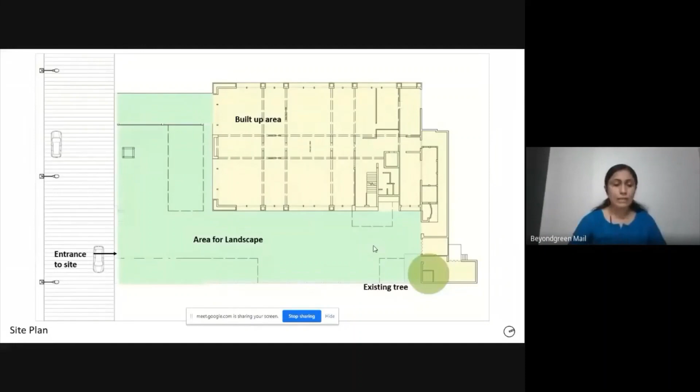So we started with the facade development and first did some volumetric studies for this. While we were doing this, the intent of the design was to create a facade which was site responsive, climate responsive, and at the same time aesthetically appealing in the context where it was situated. Our approach was firstly to shy away from the whole idea of what we call pigeonhole window facades, and instead have a screen which will make the skin of the building.

This will also allow the visual connections as well as cut down the harsh light, since the major two facades of the building were from the southwest and the southeast. The other observation we had was that the building felt very flat, and we thought we should increase the volume of the building in some way.

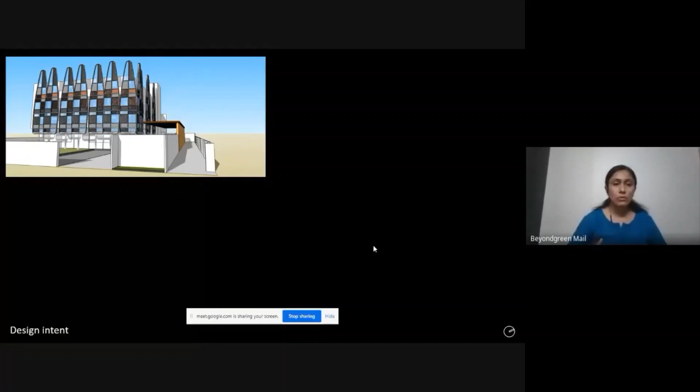So this was the first attempt we made for the development of the facade, where we had these huge leaves in the form of screens, and you can also see how we extended it over the height of the building. But then somehow we were not convinced with this.

Then we started thinking about what if we extend the floor planes and get some space for greens into it. You can also see the facade has been extended on the top to make a frame, so it looks like an added floor on top.

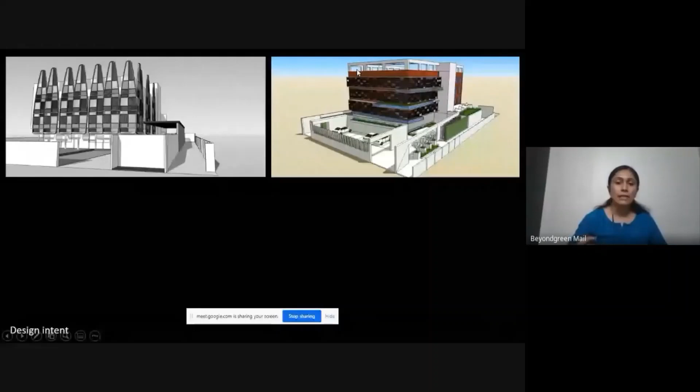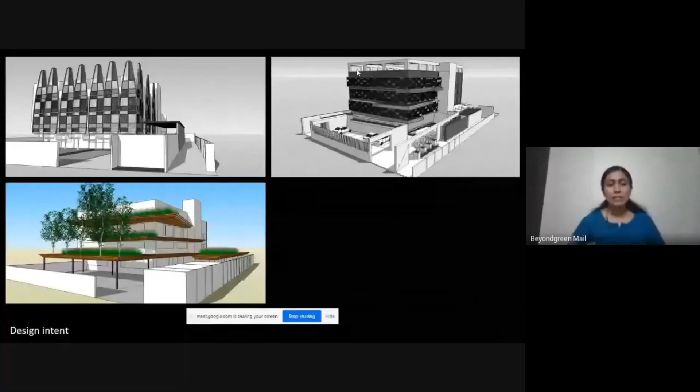And then, like a greedy designer, we extended these floor plates still further and started putting in the green. We always had this idea in mind that it should be green, so the building looks like it's behind the trees. After doing this, we got a mail from the structural design team saying this isn't possible, since we were increasing the load with the soil, the increased slab, and the trees over it. So this was not happening.

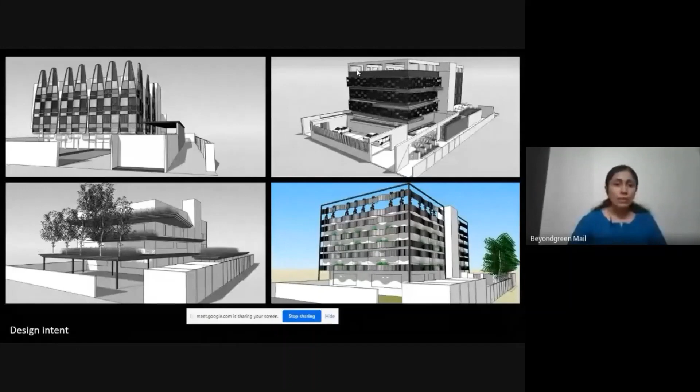So then again we were back to the building planes, and this is what we thought: to make the building with some corrugations and have some nice green insertions. But still not giving up the idea of extending the planes, we strategically approached the design again. And this was finally what we did.

We had the screen in the form of louvers, and the ground floor slab was extended. It also defined the main entrance of the building, and you can see the frame in which these louvers were placed properly, which also enhanced the overall volume of the building.

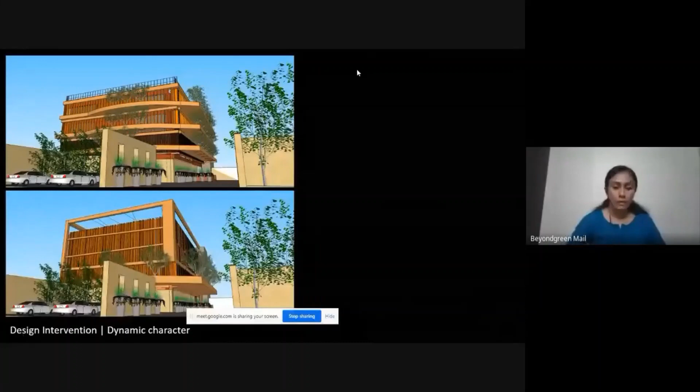So this was how the final composition came together, where we had the ground floor as a stone-cladded box, the corner as a jali, which was also a main focal element when you enter the building, and the frame that you can see, which very well screened the louvers.

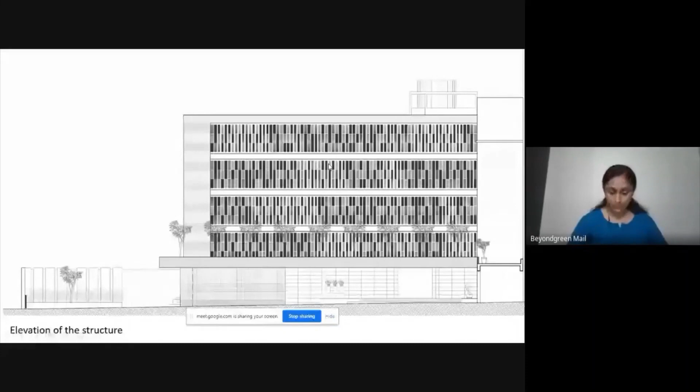Later on, we thought—initially these were made as single whole pieces of louvers, but then we thought this was not giving the character that was expected, and hence later on it was divided into 3 parts.

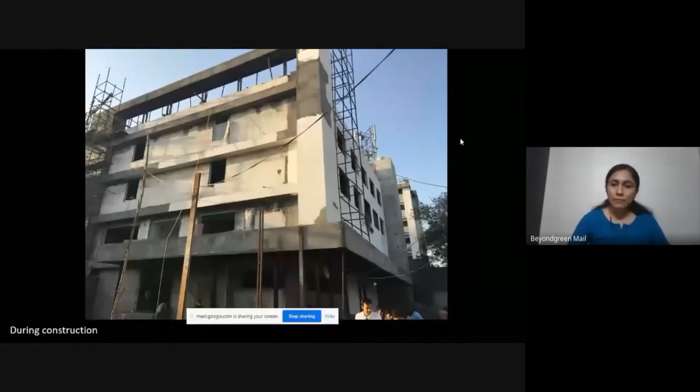So this is during the construction. You can see the main frame coming up, and on the other side you can see the other stage, where the louvers were installed.

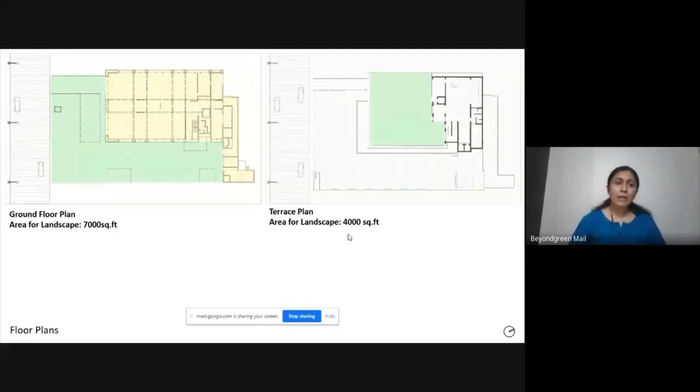While all this was happening, we also started working on the landscape part of the project. The 2 main areas we had were the ground floor and the terrace. The terrace was to be designed as a book cafe, to be used during the weekdays, and as a silent DJ party area on the weekends.

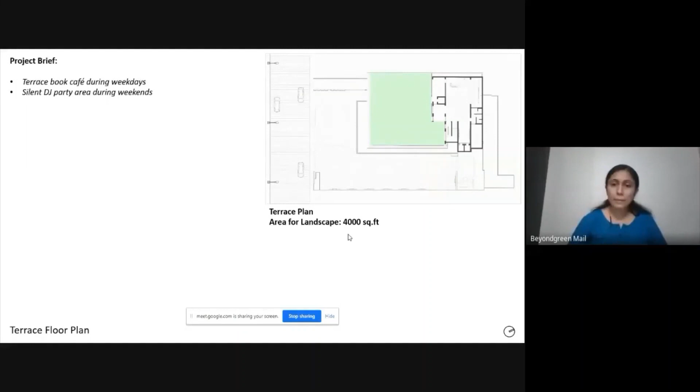So this was the terrace plan. Because we were extending the frame of the building on top, it actually enclosed the terrace very well, and it did not feel like a leftover top floor of the building. The supports were very well placed on the existing columns of the building.

Then we started throwing ideas around the office for how a book cafe should be. The book cafe was placed in one corner of the building inside, and the other way there was the entrance to the terrace.

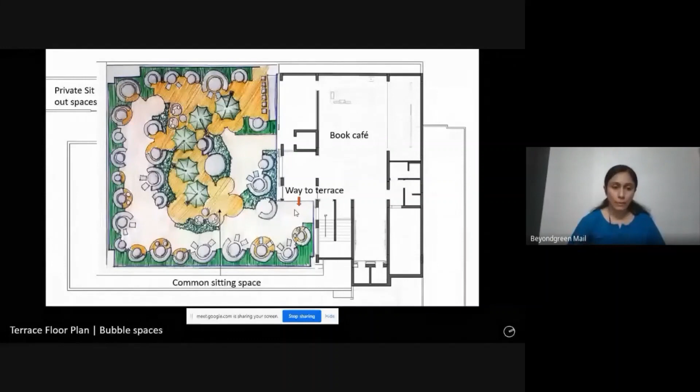The initial thought was to make a very huge group of bubbles, which would be private sitting spaces, with a central common sitting area that could also double up as a dance floor. But then it started feeling more like a college canteen vibe. So we thought it should be a bit more formal, and we started designing these formal cubicles instead.

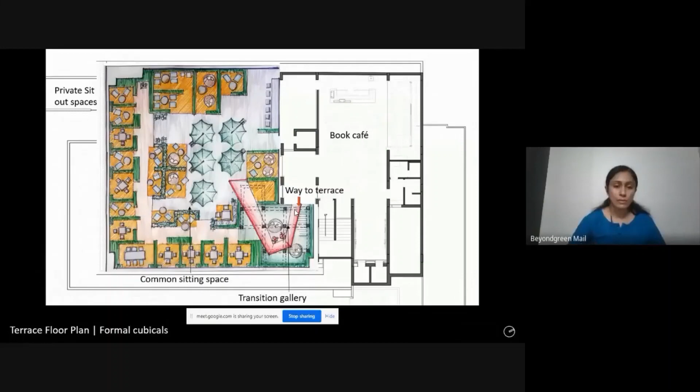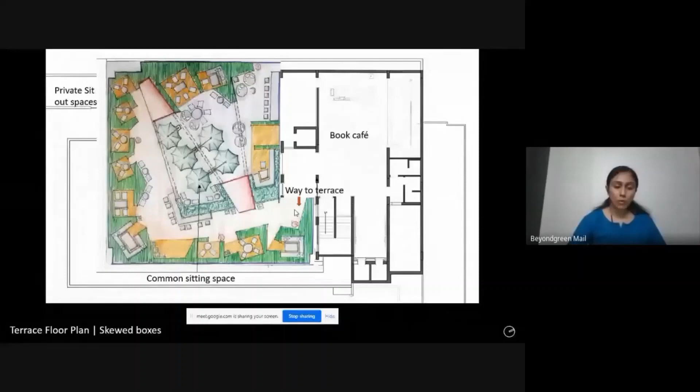And then refining it further, the cubes were again done, and then finally we thought, why not skew them so that the green actually wraps up all the skews together. And then finally, we thought of this where the skews were actually thought of like pods. So these were the party pods or the reading pods.

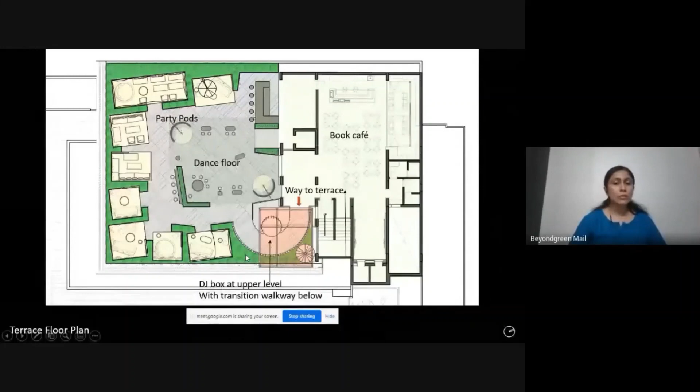The central area, you can see, was with the loose furniture, which was used as a dance floor during the weekends. And the other important element along with this was a DJ box, which was placed in a corner and also elevated so that it did not come in the way or hurt anyone during the weekdays otherwise.

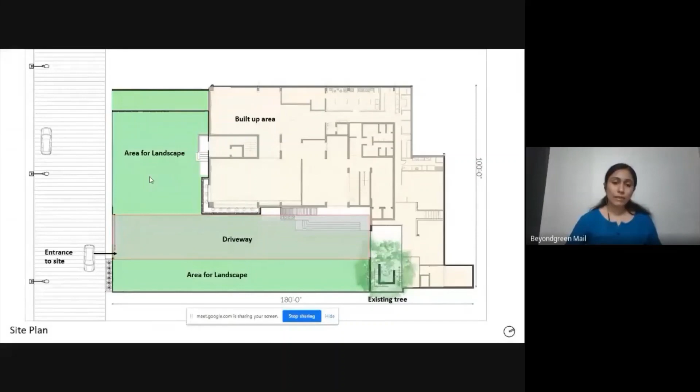While all this was happening, there was another area on the ground to be landscaped. The first important element here was the driveway, which cut the whole area into two parts. Then came the parking, and since the building use was such, the whole area was occupied by parking. So the question was, where is the space for the so-called landscape? This was the space that was left, with the wall at the bottom that you can see.

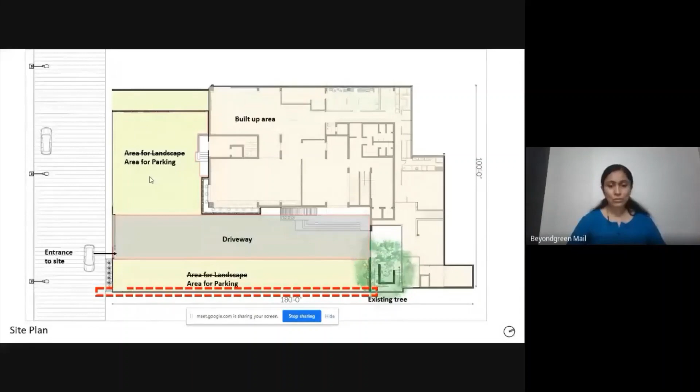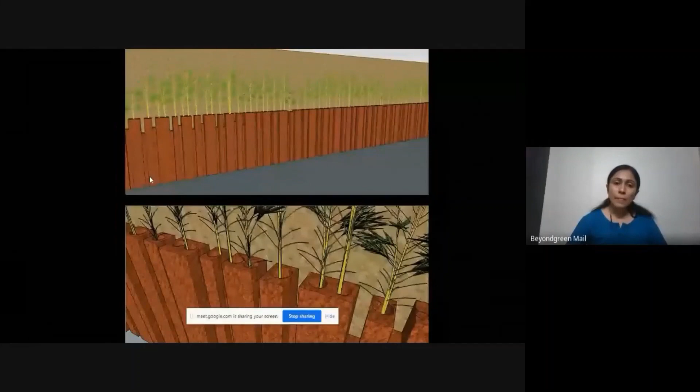Like any designer who takes every point as a challenge, we started calling this the theme wall. We first thought this to be a long series of slender planters with specimen plants. Then we thought, why not break the conventional planter idea and instead have small test tube vases with flowers, with lights integrated as part of the whole composition.

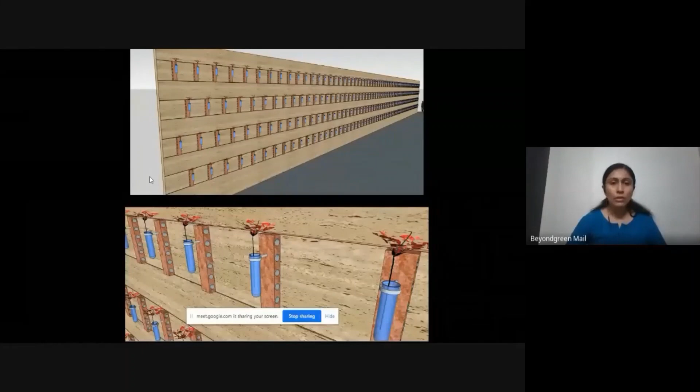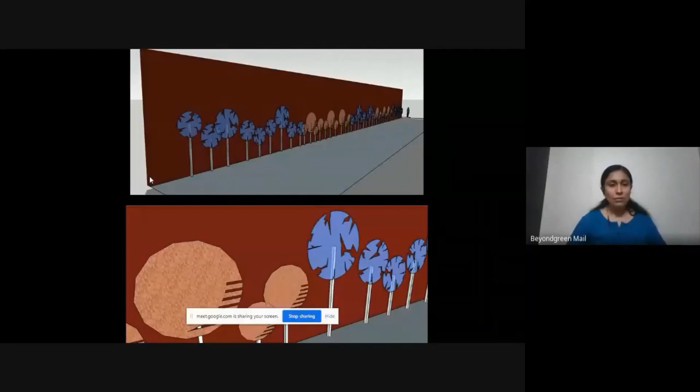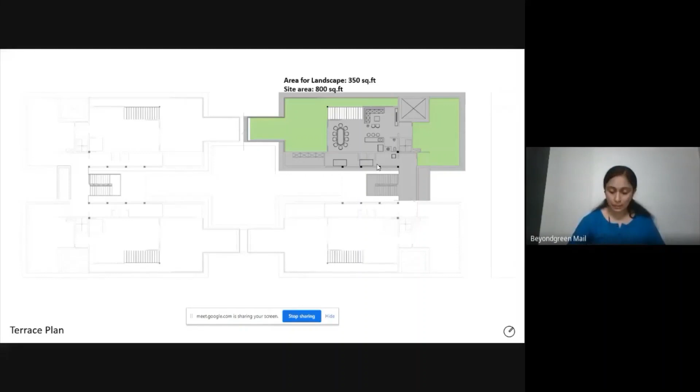Considering the orientation of the building and how the terraces were divided, the terrace on the right we called the Sunrise Terrace, and the other side the Sunset Terrace. The Sunrise Terrace had a little breakfast area on one side, and the other terrace had a bench, a raised deck, and planters. One could connect from the staircase inside directly to the Sunrise Terrace or to the lounge, while the area behind the lounge was used for servant movement.

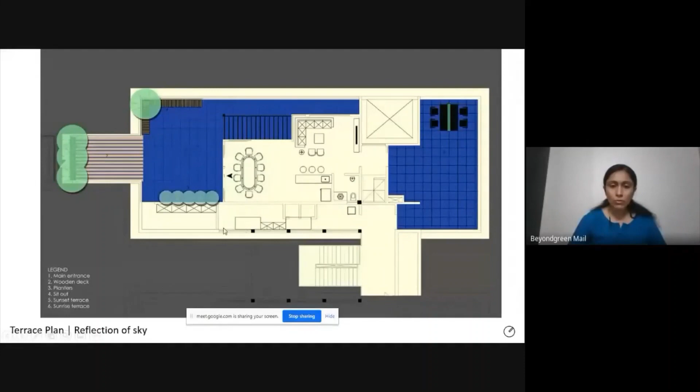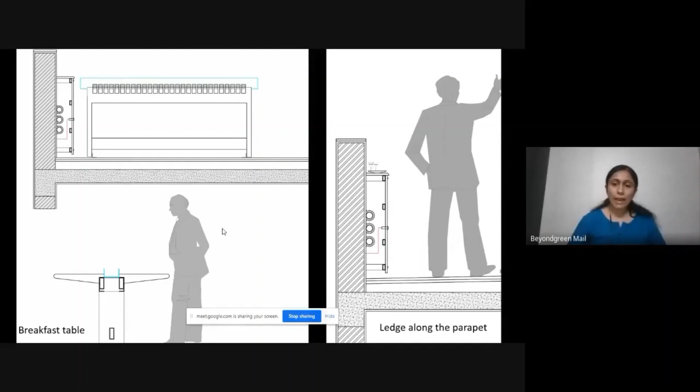The parapet wall, like any other terrace, had many pipelines running through it, and the challenge was to cover the pipes running through. So we made this box over it, and thought of it to feel like a ledge, so when they had guests over, it could actually be used to keep a glass or a plate.

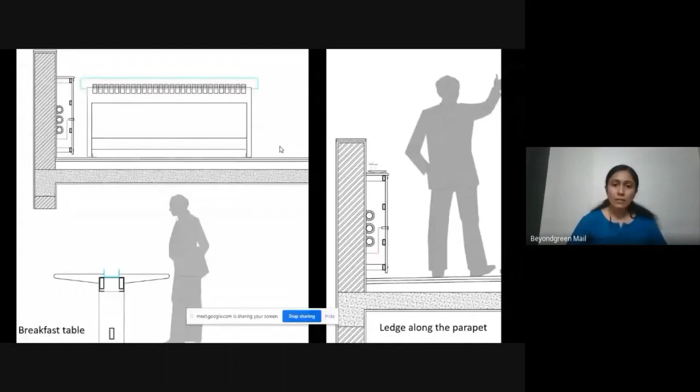The bench was thought to be slices of wood actually hanged over the parapet wall, and not as a solid block.

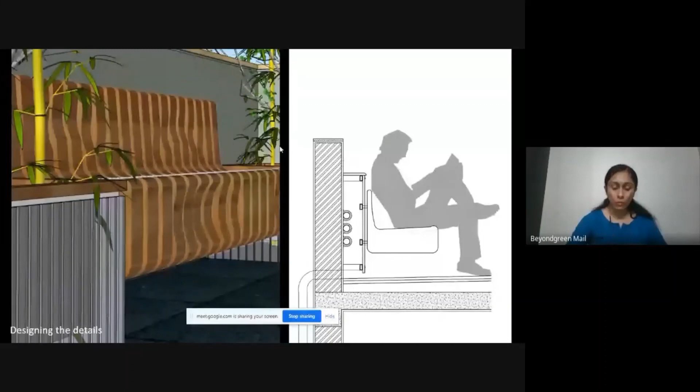This was the bench where you can see every single piece separated, and the way it was detailed out to have this curved edge, so that the cushion is placed over it and does not slip out. So this is how the bench looked.

So the bench was imagined to be floating over this blue floor. And the way the floor reflected things, it actually felt like water, and hence the name of the project we kept as Liquid Sky, where we had the reflection of the sky and that feeling of water.